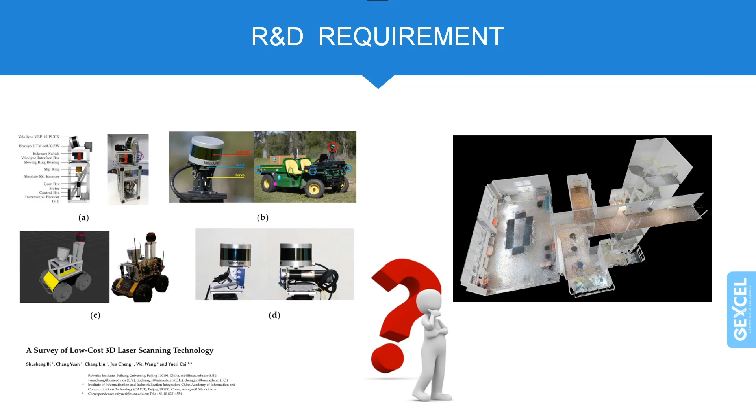Hardware or software kits to test or improve SLAM-based applications are a frequent request from research institutes, universities, and companies with a developed R&D department.

GEXCEL is now offering this option with the new HERON ROS converter, a tool that allows you to use HERON as an efficient capture device with full compatibility with the open-source ROS software development kit for robotic applications.

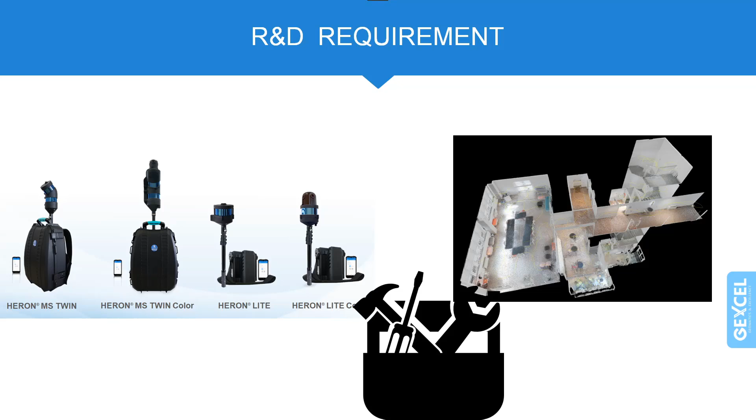The HERON ROS converter generates an output bag file from the HERON RAW acquisitions, opening the possibility to customize, develop and test your SLAM approaches starting from the synchronized and calibrated sensors.

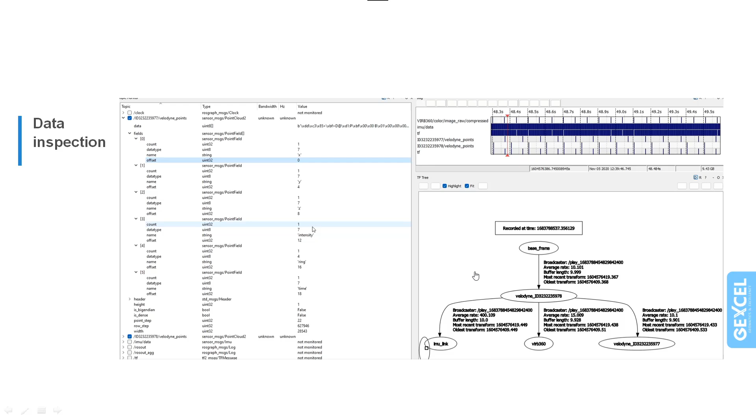After performing the HERON RAW data conversion to a ROS bag file, you can play the bag file and use the RQT tool to monitor the ROS topics that have been broadcasted. To the left, you can see the two Velodyne topics.

Polar conversion to Cartesian coordinates has been performed, and here you can see the 6 available fields for every individual point: the 3 Cartesian coordinates, the intensity, the ring number, and the individual timestamp for every point.

Regarding the inertial data, you can get angular velocity and linear acceleration, both referred to the XYZ axes, and also an orientation value which is given in quaternions. Regarding the image stream, it's a stream of JPEG images being broadcasted at 15 Hz.

Here on the top right, you can get a sense of the frequency of every sensor. As I said, the images have been broadcasted at 15 Hz. The Velodyne performs a full rotation in 1/10 of a second, and the frequency of the IMU is much higher, around 400 Hz.

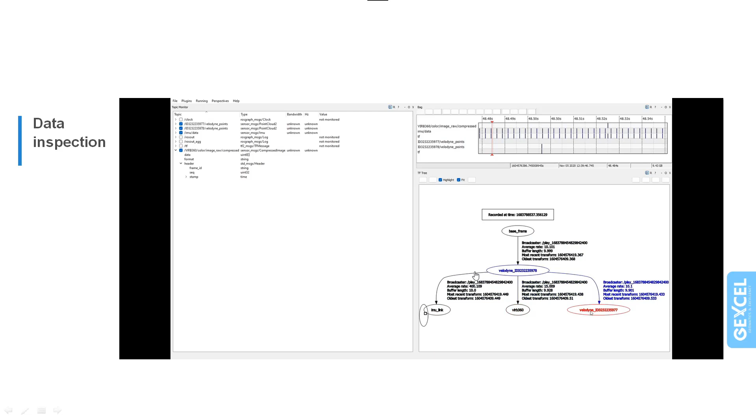On the bottom right, here, you can see the TF tree of the whole system. There is a base frame which represents the walking direction, then the main Velodyne, and attached to it the inertial sensor, the camera, and the secondary Velodyne.

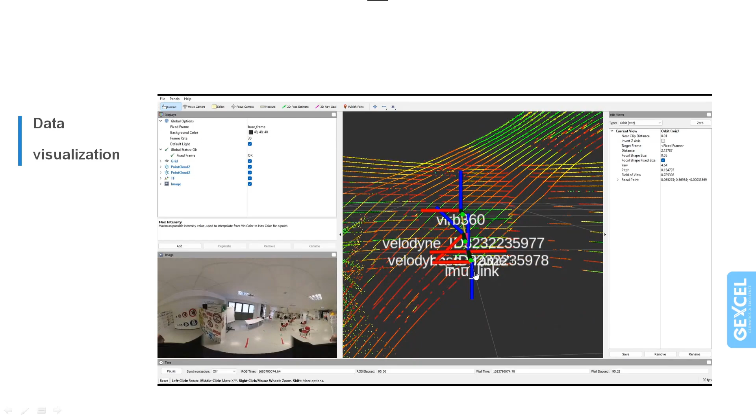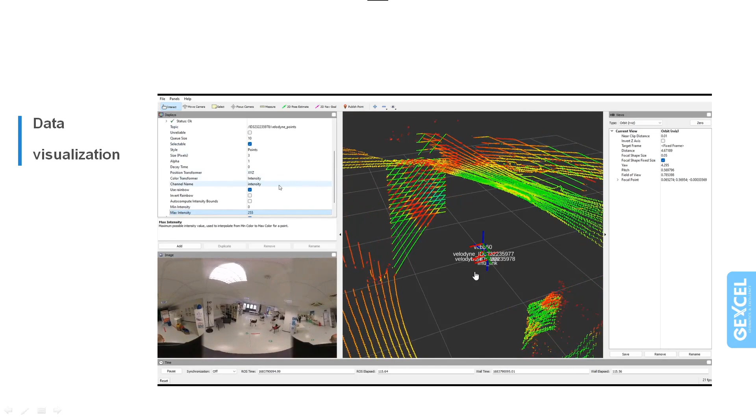On the left, you can see in the topics 2 broadcasted point clouds, 1 per Velodyne. Expanding, you can see 6 available channels for every point: intensity, ring number, time, and the 3 Cartesian coordinates.

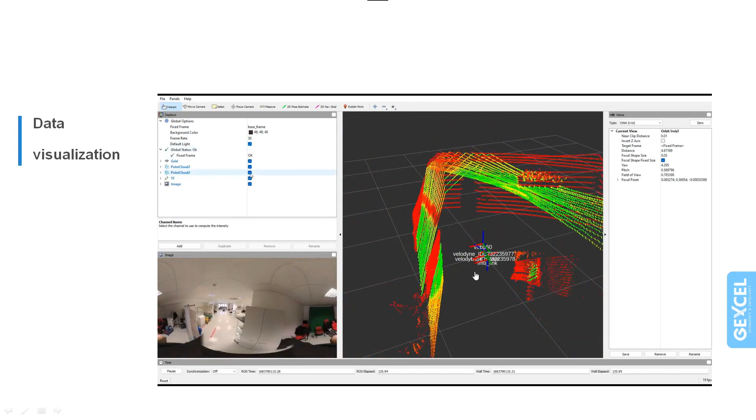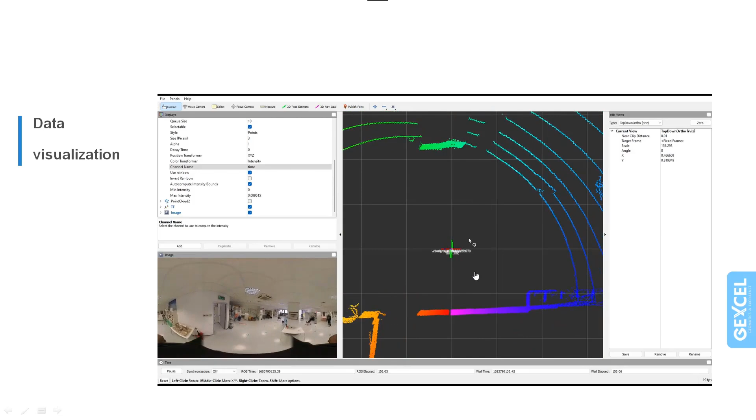Regarding the time, we can visualize it properly in this way. Setting a top ortho view, you can see that inside a full rotation the timestamp of the points starts at 0, and it increases monotonically until it completes the full rotation.

All details regarding the usage of the converter, the data format, and all required parameters are explained in a specific documentation provided with the ROS converter.

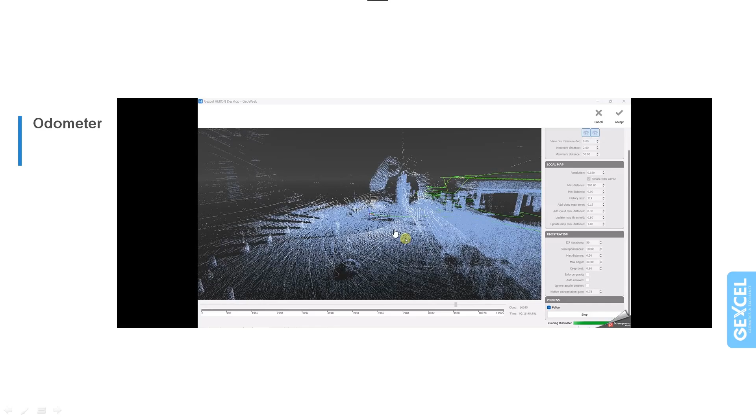The HERON system is also provided with a suite of software to create a final trajectory with full control of the SLAM parameters. After the data capture, HERON Desktop, that we can see here, allows creating the trajectory, defining presets for several survey conditions.

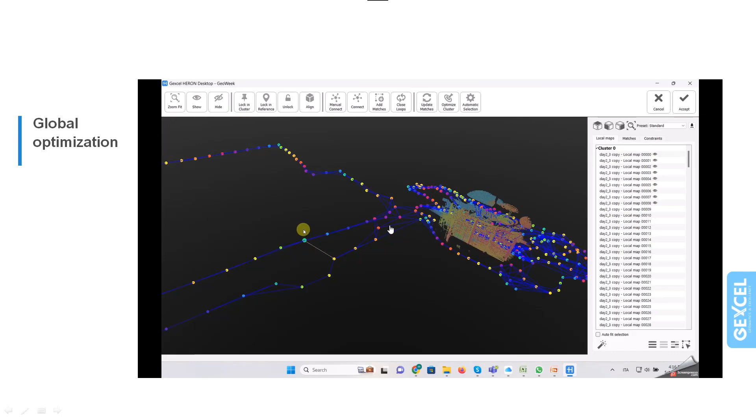The global optimization process includes the possibility to insert coordinate constraints using ground control points, terrestrial laser scanner, or generic georeferenced point clouds. The HERON software suite covers the entire workflow up to the data analysis, visualization, and then export in open formats.

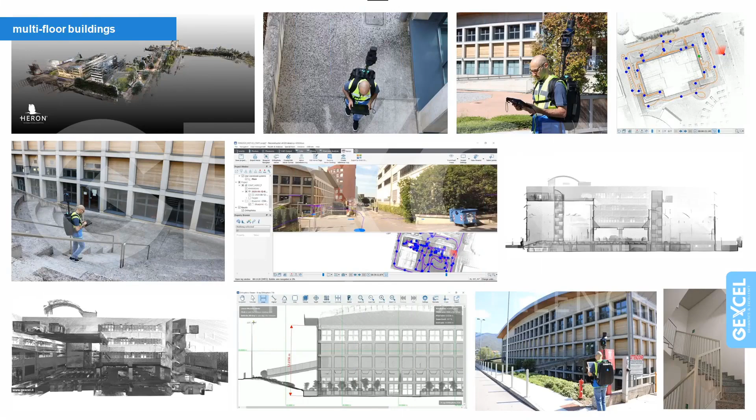Thanks to its versatility, HERON can be adopted in several applications, from multi-floor buildings to urban mapping, scan to BIM, underground tunnels or cavities, forestry, or stockpile volume calculation.

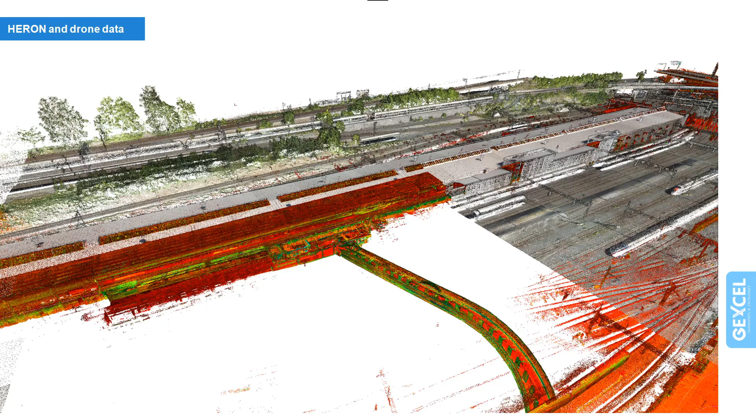HERON can work integrating multiple sensors using drone data, traditional mobile data from car, or terrestrial laser scanner. As you can see here in this application, where drone data are aligned and overlapped with HERON mobile data.

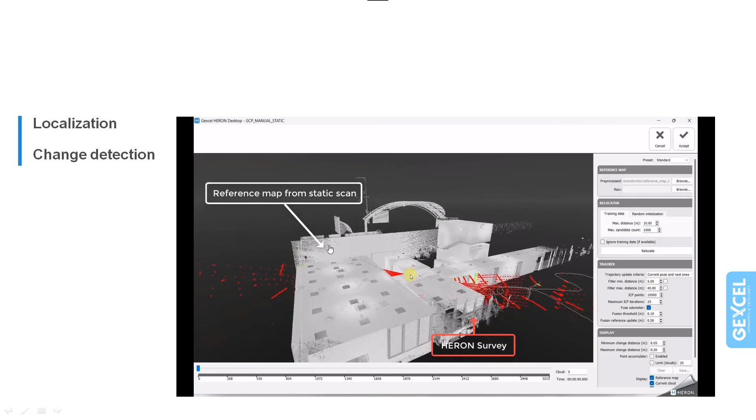Last but not least, HERON is working not only as a mapping tool, but also as a localization and change detection system. Given a point cloud or a BIM model of an area, you can survey it in time, localizing HERON with respect to the reference model and detecting the possible changes occurred in time.